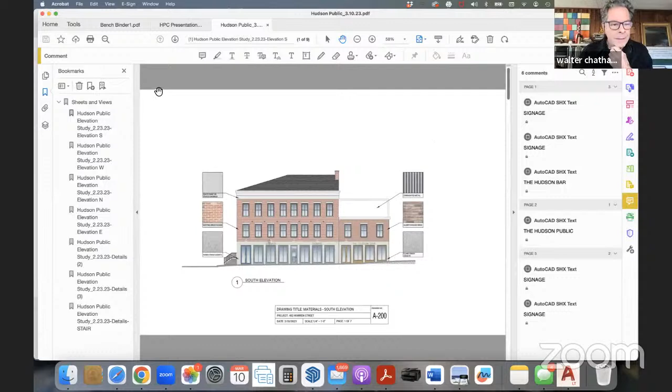Walter, is this all in response to comments by the commission at the previous meeting? Yes, my understanding was you wanted some things explicitly stated on the drawings, so we've done that, hopefully to your satisfaction. I'll run through them quickly. We've called out the materials on this page and indicated a difference between honed and flame finished granite for the two facades, and as discussed last week, slurry washed brick for this, while the existing brick would just be repointed and treated in a sympathetic historic manner.

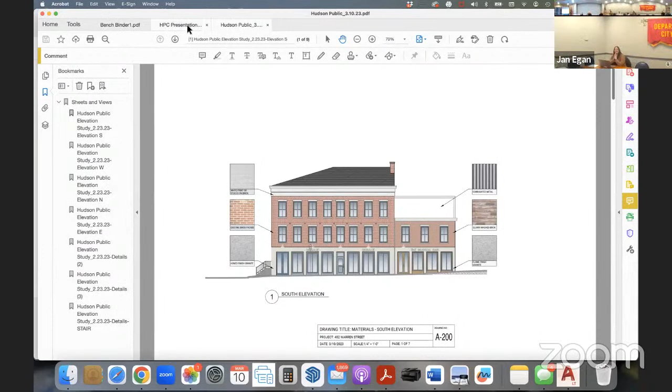Let's go back and vote on 402 Warren Street unless there's other stuff to do. Okay, I'm so sorry, so here it is, there it is right there. Can you see that? Paul has to unmute himself.

Yes, we can see that. Apologies for my confusion, I hit the wrong button and just started talking.

So I was asked, I think by Chip, to be a little bit more explicit about what we were proposing for the storefront and the windows.

So I've included the actual sections and elevations of the Lincoln windows, and these are the windows that are there now. They're actually a simulated divided light, with inside and outside bars with a little spacer between, and then the insulated glass. So these would be identical to the existing windows on the existing facade, except that the ones we are proposing will be single hung, and the other ones are inoperable.

And then there's also a single panel of glass here, which would be treated more or less like the wood panels are, but it would be glass instead of wood.

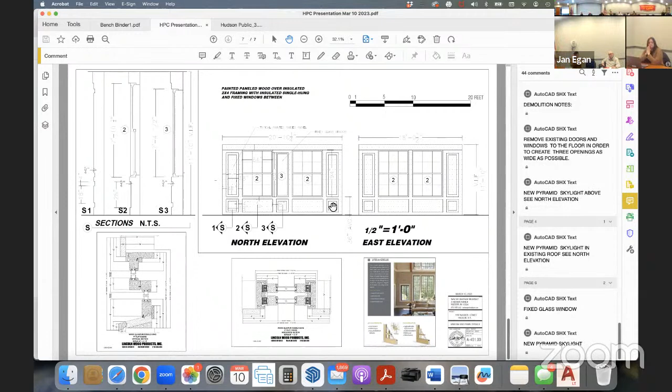Did we also ask for fence detailing and the pyramid? Okay, I have the pyramid. Sorry, the fence is just a dog-eared fence.

Hold on one second, let me see if I might have to go out to share this again. I guess he's eliminated... have you eliminated the...

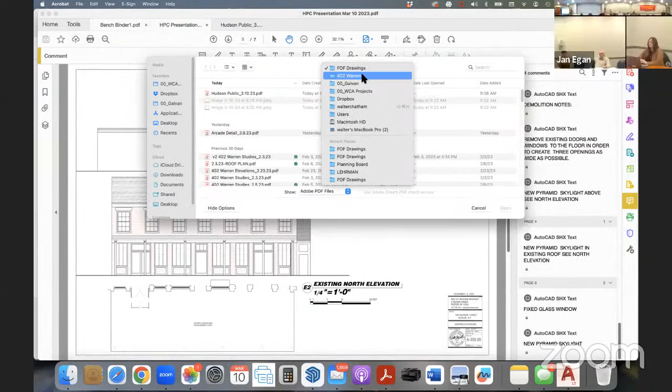Photovoltaic solar panels in this application? Yes, they were, I apologize for any confusion. They were taken out of the application last meeting, so yes, that would remain out.

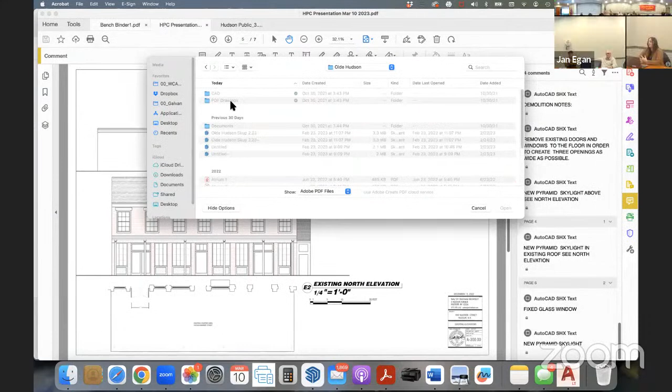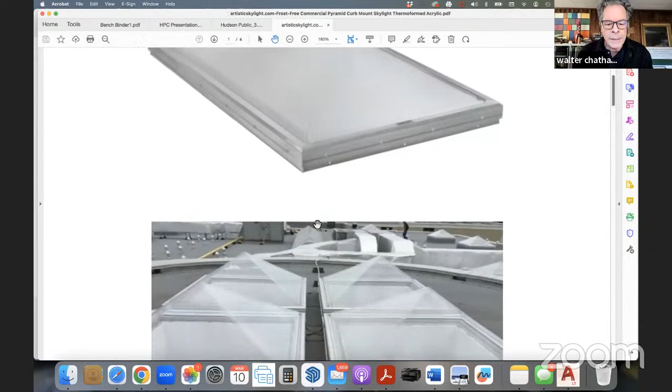Are you seeing my screen now, the skylights? Yes, okay, so again, I use this term generic. This is just one that happens to have good performance criteria, but this is really what I'm talking about for the skylight. So it would be a thermally insulated double clear acrylic pyramid, basically.

And the plan calls for one of them on top of the atrium area. Correct. But do you have the specs on the plan?

Because Craig wants to see the specs in order to give you a building permit once this is approved. Okay, yeah, sure. Generally for Craig, we just say a skylight and it meets the insulation requirements and the code requirements, which this does, but I'm happy to specify this exact skylight if that's what you're asking.

I think this is pointing out a disconnect that you have with what's required of the commission and what's required of Craig. What's required of Craig and what is required of the commission is really the same thing: a full set of construction documents that Craig can review and issue a building permit on, and that the commission can review that shows all of the details of the work to be done. So it's not one set of information that comes to the commission and one set that goes to Craig. The information needs to come to the commission, needs to be approved, and then it's given to Craig for him to approve for the building permit and to implement.

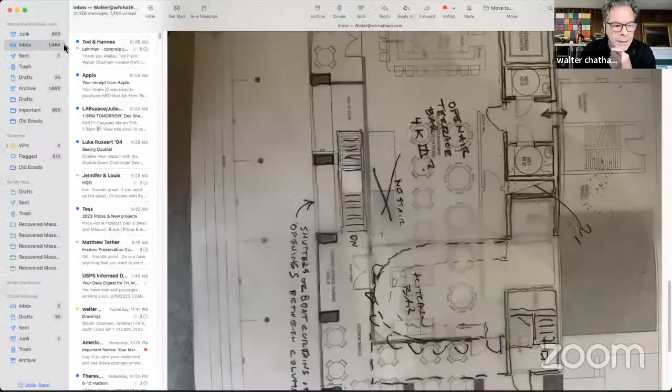Okay, this is super dangerous, but I'm going to share my mailbox. What I just sent you was this. Can you see that? It's a hand-drawn sketch. Oh, no, sorry, I'm gonna stop and start again. There, can you see that?

Yes. Great. So again, I'm super apologetic about this. I wasn't trying to be disrespectful. I thought this was so generic, if I just said it, everybody knew what it was. This is a dog-eared fence. That is 6 foot tall.

They sell them at Home Depot. The reason we're suggesting this fence is because it's going to get a lot of abuse and will probably have to be replaced frequently. So this is just a panelized system I'd like to use.

This is obviously the inside, what the owner would see. The outside is just the straight pickets. And again, I apologize. I think we've gotten 2 or 3 of these approved in my time in front of this board, so I thought this was an old friend.

Hey, Walter, that's a containment area for utilities, refuse and whatnot. Mostly for her boxes for the cardboard, yeah. I see. Okay, thank you. You did explain that in the last meeting.

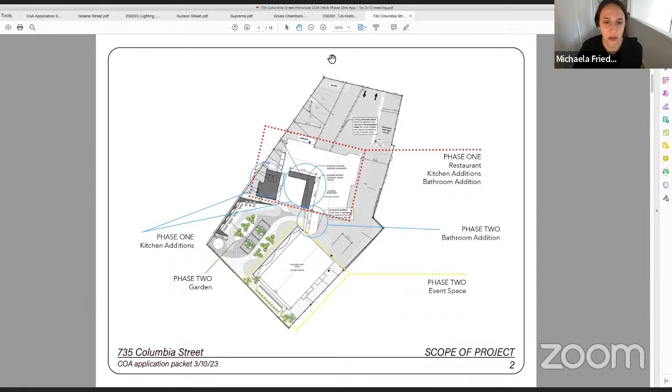So I'll hand it over to Matt to do this introduction. Sure, so this is Columbia Street right here, this would be the front of TJ's Auto right now. This is the shed in back, this is a fence, this is open to the St. Charles parking lot, and then this is an alley right here. The white spaces are the existing structure, and the gray spaces are the additions we're proposing to adapt this building to be a restaurant up front, an events space in back, and then a garden back here.

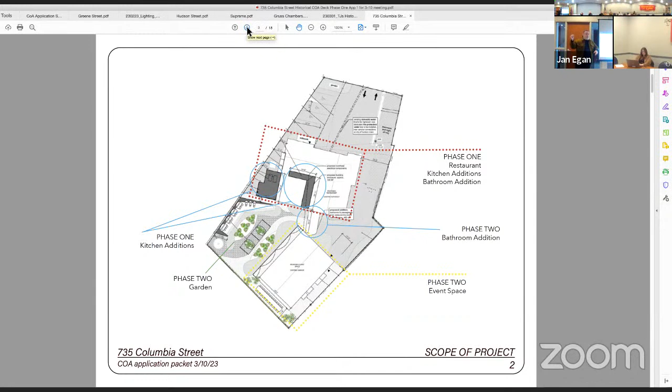So as we talked about the phases, we are going to focus on the front building first. That is going to be where the main kitchens are, and where the restaurant is going to be. So that is phase one for us, everything else is pretty much phase two. With this board we want to present to you phase one and phase two. Phase one is the front building, and then we would also tackle signage at a later date after the physical building is approved by you.

These are contemporary photographs, and you can see how we're... oh sorry, Matt, I think there's a delay, it should be on the phasing slide where we break it down by the different applications. Yeah, maybe we're there now.

Okay, so you can see how we're proposing phase one, application one: basically we'd like to make some changes to the storefront. We have doors, windows, exterior painting. We need to do some repairs to the roof. We do have some additions, and of course signage we would like to tackle after all of these things have been approved. Phase two would be about the back. Does that sound appropriate? Understood, great, next page please.

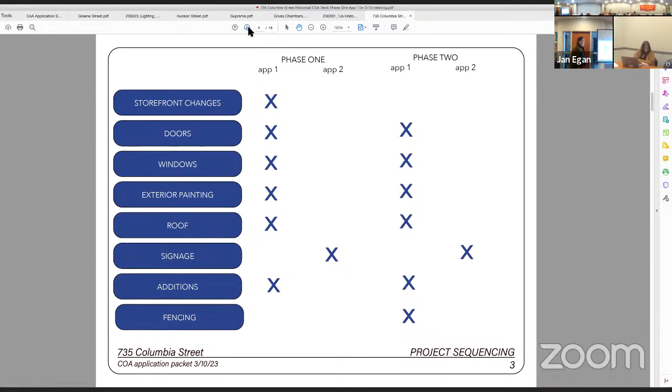Okay, so the building history: built around 1935, it's a Pure Oil station. It was white with a blue roof, made to look residential as a marketing tool by the Pure Oil company, so that this kind of establishment would be welcome in a residential community. At the advent of the automobile, people needed gas but didn't want a dumb gas station in their neighborhood, and so this was one of the first times architecture was used as marketing. It did start out white, sparkling white as they say, and the blue roof was also one of Pure Oil's brand colors. Next slide please.

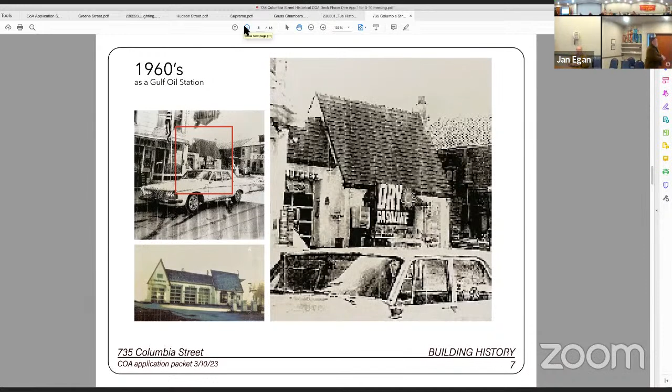So this is from the 1960s. You can see here how the building was white at one point, kind of the original coloring. You can also see that the storefront was a bit more residential looking, and it is our hope to make strategic choices to take it back to that feeling, but not necessarily restore it to the original facade. We can go to page 8 please.

So at some point—is it frozen? Did it change? No, not yet. There we go, there you go.

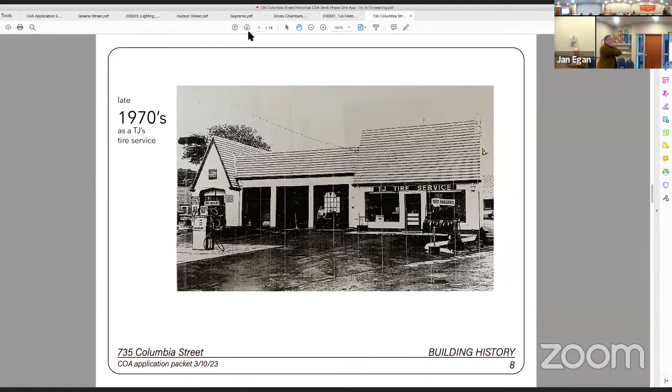In the 70s when TJ bought it, he kept it white for a little bit. You can see a bit more of the facade here, how it was amended to be more straightforward with picture windows and a squared off door. If we go to the next slide, at some point in the 80s, I'm guessing, the white went away and it turned into the version of what it is now, so to speak. It's brown now, exposed brick on the facade, and then the sides are painted to kind of match.

Sorry, I was jumping back to the original, to the contemporary photos. Did we get there? Yes.

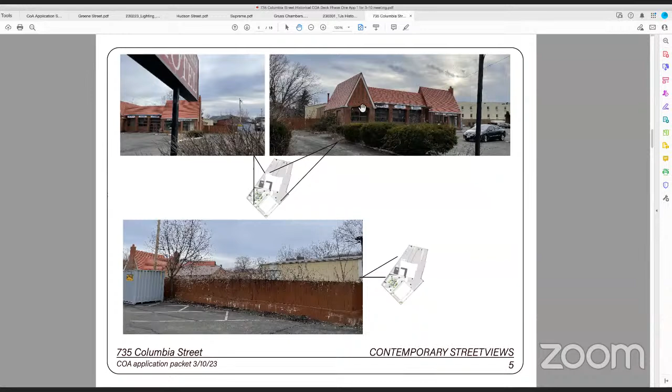Yeah, okay, just wanting to point out that TJ really loved paint and there's a lot of painted things here. The only thing that is not painted, even though it was originally, is the front facade of the brick. The roof is painted, all the trim is painted, the sides of the building are painted, the back is painted, everything's painted except for this front facade.

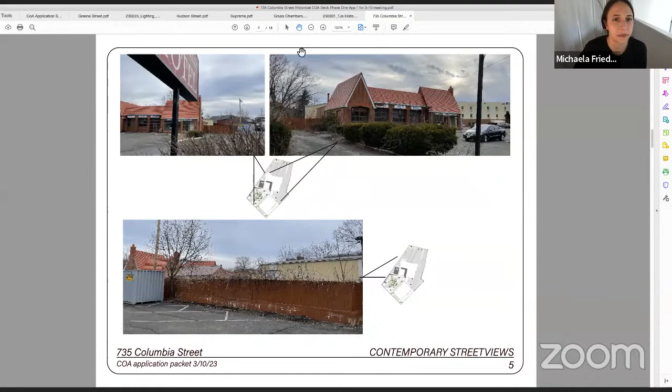So I'll jump forward to where we were. Oh, here, page 10.

Yeah, I think that's good. I'm going to jump to the elevation drawings, just because they're a bit bigger on the screen for you and a little higher definition. But I think, like Matt said, we're really excited about this combination of typologies, this commercial, more pseudo-industrial program mixing with domestic elements. We think that's incredibly interesting and would like to do the same.

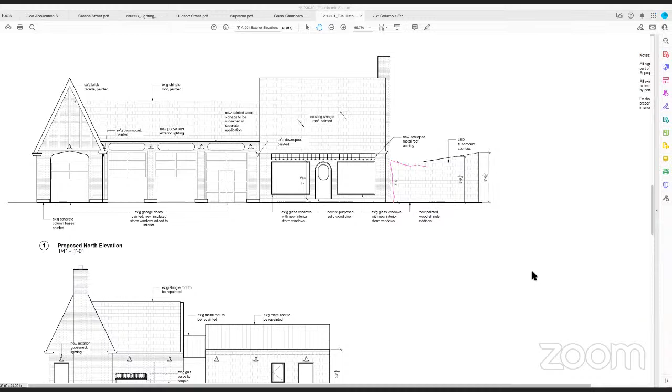And here we're using a sawtooth style roof, which is interesting - it's a very commercially used type for roof, cladding it in wood shingles, which is the more domestic building material.

So there are 3 garage doors that have been there since the beginning. They were never replaced as far as we understand it, but obviously we will need to bring those up to code in terms of insulation. Right now our current thinking is to work with an insulated polycarbonate type storm window on the interior so that the exterior image stays the same as the original doors, and paint and restore the wood as necessary - they're actually in pretty good shape. We just need to address it from a thermal perspective.

Exterior lighting, this is something that was submitted as part of site plan approval with exact specifications for the fixtures. It's a gooseneck light that is going over basically the entire building, and we're trying to really use one main light and then supplement it with step lighting at the bottom of the building for pathways as required. And the two storefront windows that are there now, we would also like to preserve.

We need to do a feasibility study. I think that they're just single pane glass. So again, we would need to look into either replacing the glass and keeping the opening as is and kind of just replacing in kind with a new specified window that meets code, or again, take the storm window approach, because they're not operable. So that may be possible to do without replacing the glass.

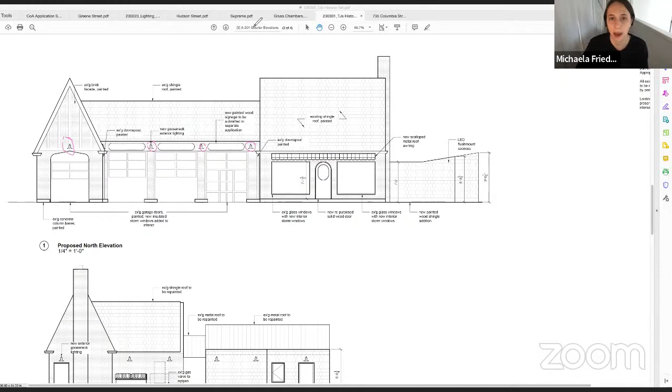And the other addition on the front is the scalloped awning, which we also drew some inspiration from some of the historic photos for. They used to have these kind of curved scalloped awnings that we'd like to bring back to this project as well. So that is the front building.

That is the front elevation from the street. If we look at the right side of the building and walk around it, that's the west side. So the front elevation is the north. And this is sort of how you get to the addition. It's sort of more of a service facade. It's where trash and recycling is. It's where the gas valve is. And it's going to be where the entrance to the addition is, but the addition is purely for back of house, dry storage, wine storage, staff entrance.

So that's what you're seeing here, this new door. And where I'll just highlight the sort of new addition is this guy right here. And that is just going to be a wood shingle. You're seeing the front pitch of the facade. It's sloping down behind it back to where the original building is. Same gooseneck lighting all around. This new addition will have a single window and a new front door.

And on the left side, actually, you know what this is? Oh yeah. Oh no, this is actually an existing window that's here, not a new window. So we would take the same approach as the front. We would either replace it in kind with the existing opening in the masonry, or put an interior storm window in because it's also not operable. So that is the side of the building on the west.

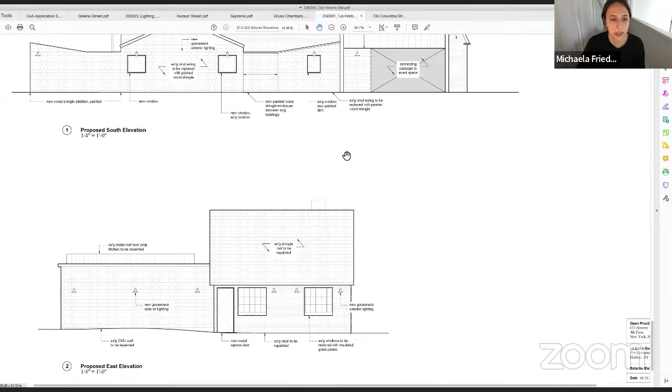So jumping back to some of the images, and anyone can also stop me at any time to ask questions and can go back to the drawings. But so this is the front.

This is one of the, so as Matt said, the doors used to be rounded. I think the windows were rounded as well. And in the 80s or somewhere around that time, they took it to this more conventional commercial square type. We really found the historical doors charming, and we need to replace the front door anyway. So we're endeavoring to, if we can find it salvaged, that would be incredible. Otherwise, it would be a new wood door in this English cottage style with a glass, a sort of oval glass pane. We would try to use this historic reference as the inspiration for that to match.

And there's also these awnings that you see in multiple Pure Oil gas stations that we're also bringing back, and would like to put that over the entire front entry area.

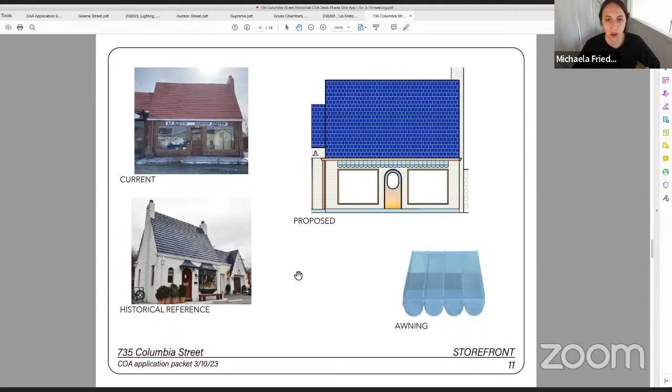These are the windows that you can see on the left. They're painted over, and we would like to work with the contractor to restore those that you see in the elevation on the right.

Doors, I guess we spoke to the front door, and the garage doors. So like I said, these are the original doors. They've since been painted over. I think that they were originally blue. We really would like to keep them. I think that they have a lot of character to the building, and it's really wonderful that they've survived all of these years. So we would really like to keep them, and just need to work with the contractor to come up with an insulation strategy that meets code.

So you had mentioned 3 garage doors were original, but I see 4. Oh, sorry, no, that's my mistake. 4. If I had said 3, that was a mistake. They're all original. One of them has this little door in it, but I don't think we would ever use it as a door. I think it would just be almost like a decorative pane. It's really a very small door. So I'm not sure, maybe they used it in the 30s. I don't know, but they would just stay closed.

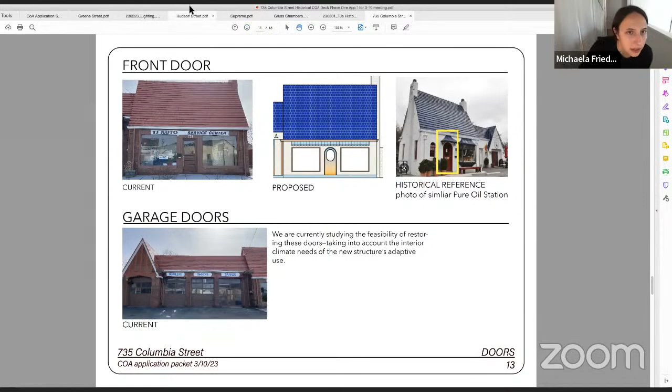So they all open through garage style. But your intention would be for those garage doors to remain as fixed elements? No, they would still be able to open. It's just that the door, let me see if I can zoom in here. All of the mechanics still work. So they still work as garage doors. There's a lever on the right side, and they go up and over the way that garage doors do, and they can sit up there.

We would just need to, if we do insulate them with an interior panel, look at the specifics of the mechanics - if there's room for an added insulated storm window on the inside, and if that still allows it to go up. It's also something that could be removed in the summer, although then we would need to replace the glass panes so that they're insulated properly to code. But no, the intention would be for the garage doors to still be able to open in the summer to let fresh air in. Obviously not in the winter.

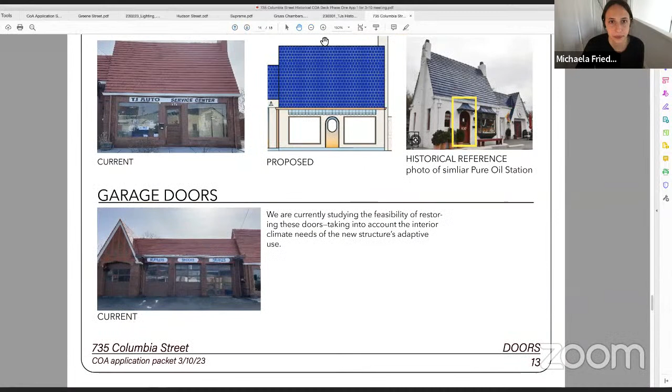Okay, so getting into colors, as Matt said, the original scheme of these stations was this sparkling white and blue roof, which we would like to bring back. We don't want to do it pure white, and we've been looking at historic color collections for some of these choices, and believe that there's some good matches here. These obviously will need to be tested on samples, for us to be able to see, and we would like to review those painted samples with the commission to confirm the exact color matches. But these are all from the Benjamin Moore Historic Collection.

The base of the building would be a very light white, not bright white, because I think that would be kind of stark in comparison to the surroundings and to the blue roof. So this is a little bit more muted. The color is called white chocolate.

And then if I can sort of step out to describe the general aura of this color scheme. When Little Debs first opened, they had friends from the community come and do interior murals, and one exterior mural on the side of the building that was this sunset ombre gradient. It became really a part of the restaurant and never got painted over or replaced. Halo, the owner of Little Debs, would really like to carry that through to this new space to speak to their original design lineage.

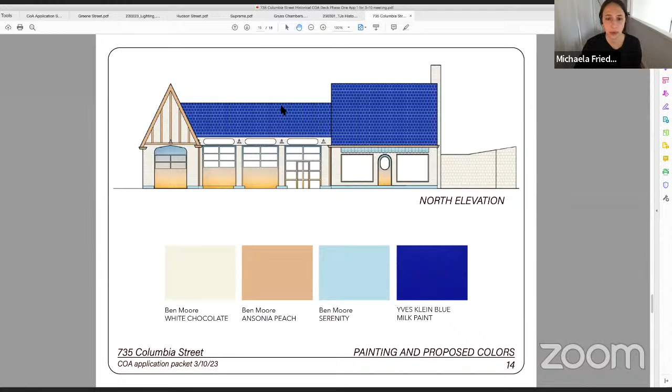There's no repairs required on this roof. It's in excellent shape on the main roof, so it will just be painted. Same thing for the brick as well. The brick is in really good shape and doesn't look like it will need any repointing. So again, it's just a paint job.

Okay, so this is the back, which is all wood shingles, and this gradient will carry over to the back. You can see the original roof that's getting painted blue in the rear. And that white neutral, white chocolate color is going to wrap all of the existing brick. So everything that's painted brick now will remain painted brick, but returning it to this white and blue scheme.

Limiting this gradient to take on areas of the facade only when it's not visible by the street, so it's not too stark a disruption. This is facing what will be the phase 2 garden, so there would be this own environment happening in the rear of the building.

If I'm understanding what you're saying, there are very few situations here where you need to introduce new materials. It sounds like there are none. There's the replacement. The only new one is obviously the new additions, and everything that's a new addition is wood shingle, and metal roof, because all the roofs in the rear are existing metal. It's only the main original roof that's shingle. Thank you.

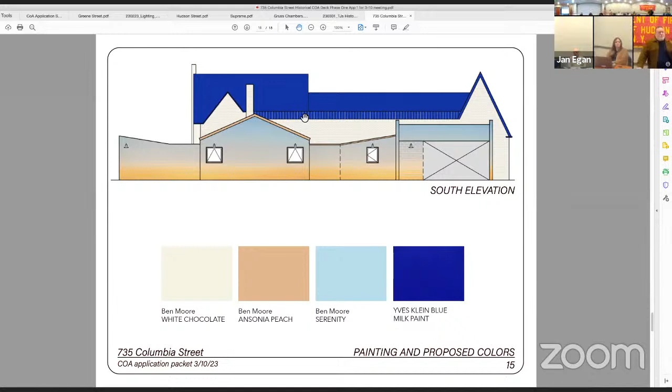So the addition on the left is wood shingle. I'll highlight here—this is new, this is the new addition, and this little filler piece is the new addition, both wood shingle. This right now is vinyl siding that's not in very good shape, this as well. So our plan is to remove the vinyl siding and make it all wood shingle in the back so that it's uniform.

What kind of wood shingle? In previous years, I've used cedar shingle, but the cost of cedar right now is quite high, so we may need to reassess that from a budget concern, but that would be the type of shingle because of its durability for the exterior.

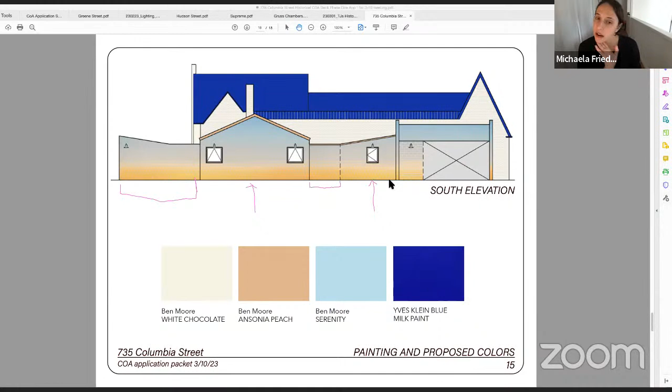It's John Schobel. Could I ask a quick question? Sure.

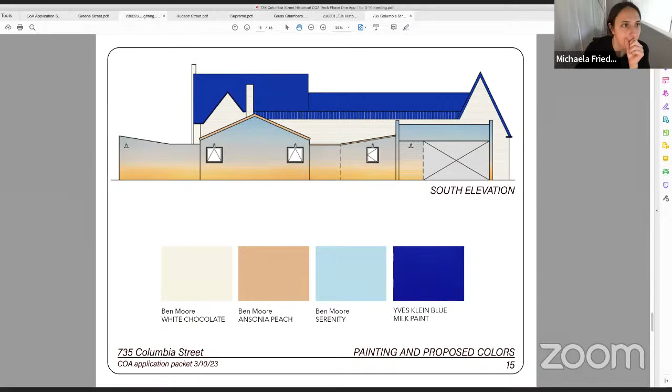The addition that you've done, is there a view of this rear that we could compare it to really quickly? Because the addition—for the existing? Yeah, existing. Let me see, I think on this front page. It's going 5 feet back from the property line, just to give a sense of how far it's coming out.

Okay, right, so on this bottom left—let me see if I can—it's gonna stick out from there. Yeah, so this door will be removed, this wall will be demolished, and it will start there, attach below the roof line at the lower angle and then pitch up, like this. My only comment on it, and I think it'll end up being minor, is it doesn't...

If you look at your proposed facade, the elevation drawing doesn't do it justice because that's set back, and you can't see the massing. It just seems like a new mass without windows and unrelated to the front facade, yet it's very clear why you did it. When I see the back facade, you're mirroring that other angled addition.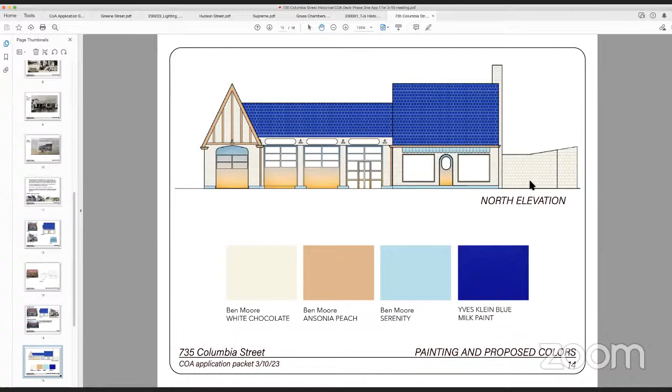And when we talk about food deliveries, there's also going to be a buried grease trap on that side of the building, so this will be the area where we get deliveries. That was just my only comment, and unless the other commissioners disagree, now that I realize how far set back it is and how it relates to the rear facade, I don't think it's problematic. Would deliveries actually come from the south side?

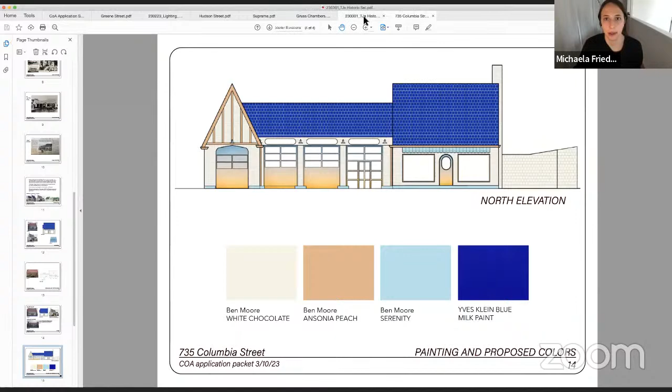We did the first one, let's do the second one. I'll jump back to the site plan. There's delivery for phase 1, delivery for the restaurant, and delivery for the event space. When we talk about large trucks for things like tables and chairs for events, those massive deliveries come through this easement on the right side of the lot. For smaller food deliveries, those can go in on dollies, which is how Little Deb's receives their food now.

The truck would just pull up in the parking area, which is all paved. Then there's this path that has a continuous 10-foot clearance to the delivery entrance in the back. The reason we're doing that is because this is the main kitchen entrance, and for deliveries you really want an unobstructed path for the delivery dolly from the entrance of the building to where they're dropping the food.

In the plan, there's a very clean, unobstructed path through to where the walk-in refrigerator is. We wanted to keep that as direct as possible, versus if the delivery entrance were, say, in the front, there'd be a lot of twists and turns to get back to the kitchen. In this drawing you're drawing on right now, we're seeing the proposed addition on the left-hand side that we're just talking about.

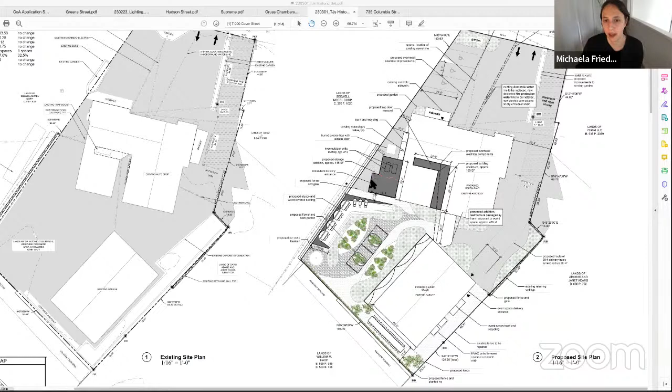There's no flat portion. The pitches are following one another, if that makes sense. So they're two pitched roofs happening at the same exact angle. Both are pitching, there's no flat roof here, so it's all going like this, I guess. It's not going to be totally flat, it will still have a 2% pitch for drainage, but it will be like this.

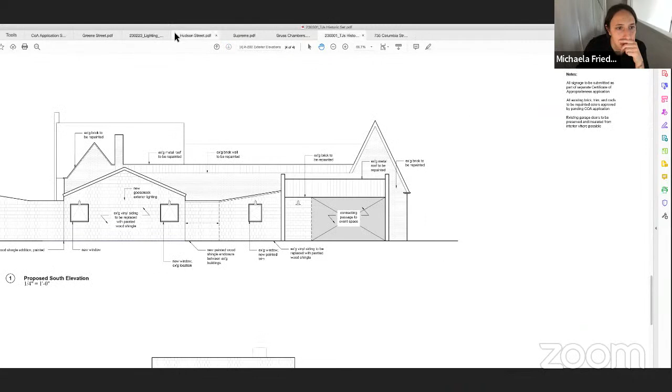Okay, but you have two distinct pitches there, one is a very low slope pitch and one is a higher pitch. Yes. Where is that low pitch and how does it relate to the existing building? The roof meets just below the eave of the existing roof. Let me see if this is shown in elevations here. Right, so we're seeing this on the left here.

Because this is quite low, we wanted to gain a little extra ceiling height where possible. Also, there's a staff room in this new addition, so giving them more headspace is nice, and it's good for drainage, which is why we used the pitch. Like John mentioned, we're mirroring the existing pitch from this existing element on the other side, so it starts up high here, slopes down, and then slopes shallowly to meet the existing underside of the existing eave.

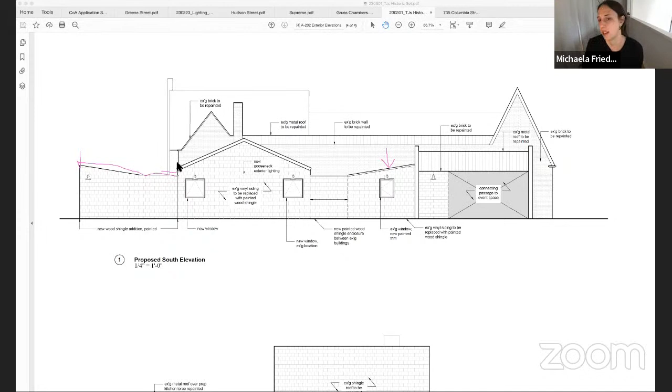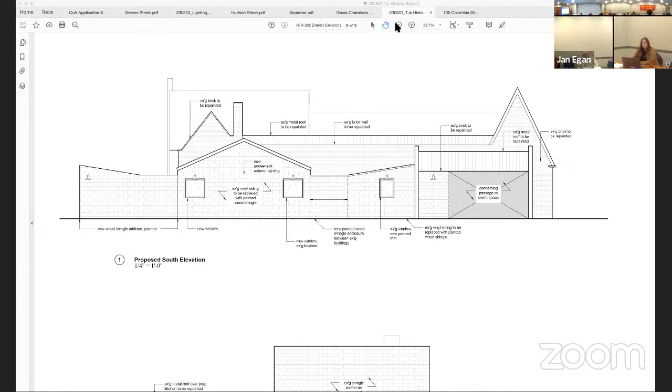Understood. However, as we're looking at this rear view, the wall of the addition is a single plane, correct? Okay, when we look at the front elevation, could you show us the front elevation of that addition?

It's a bit hard to describe in flat. I feel like a 3D view would almost be more helpful, because it's actually two volumes.

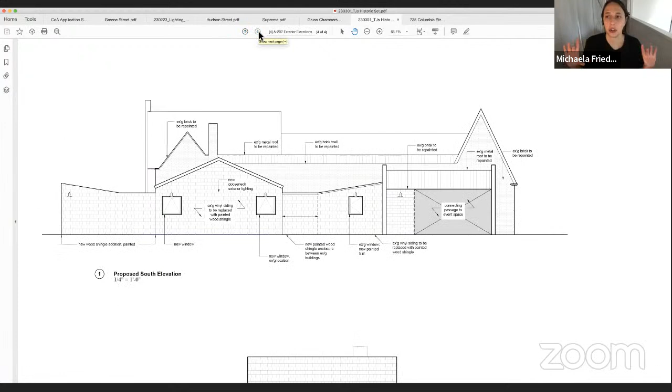The reason you're seeing it as one plane in the back is because that's the larger volume. I'll go back to the site plan quickly — we have this 5-foot setback. There's no setback requirement here, but under New York State building code, it's really about the fire rating of your exterior wall. If you're over 5 feet from the property line, you don't need as high a fire rating, which also makes it a cheaper exterior wall to build, with fewer details to get approved. So for our purposes, we offset the existing property line by 5 feet and are building within that confines, if that makes sense.

So it's sort of stepping. Yeah, I think it's very useful to see this in plan view.

I just wonder whether the higher slope roof is going to present a different proportion to the street, because in the rear elevation you're showing us, it starts up higher and goes back down. It'll be much less so in the front elevation. It would be very useful—

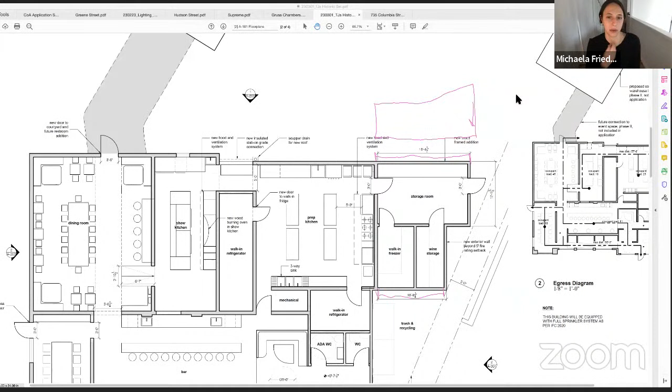It would be the front wall. In other words, you wouldn't see it from the rear though. So this is what you just sketched, the front. Use the sketch you just made up top as your front elevation. As the rear? No — you're saying the front, exactly.

So if that sketch you just erased was the front elevation, then where is the corner? You have two corners that are 5 feet away, right? Correct — this line and this line. So up top you'll have a line like this, there, correct? And so that higher pitched roof is actually going to be set back, offset by the plan. Exactly, it's set back. It's important for the commission to understand that.

I think that because of the low slope roof, it may only be 7 feet above grade, as you can see in the earlier photograph showing the side door going into the existing building. What I want to point out to the commission is that this addition is very much at the scale of a fence, and has much more the appearance of a fence in terms of massing than a building with a roof on it, because you don't really see the roof. So as an architectural element, it's very much downplayed because it has the scale and appearance of a fence.

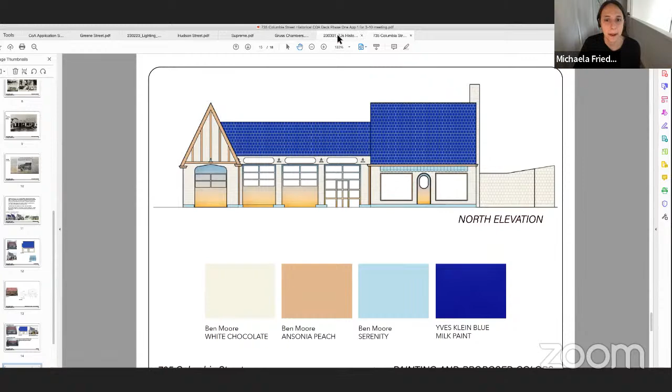Yes, so it's in the plans, or the elevations rather. I think that some consideration might be given to visually protecting that from the street.

Even though this is, when we think about this building, it has a very unique visibility from Columbia because of the parking lot of the St. Charles. And so I think that this addition you're proposing on this side will have some significant visibility, and I think it just needs to be understood by the commission. It's a little hard to understand it because, as you point out, a three-dimensional sketch of this would be much more informative than the plat that you have.

Sure. And I think that, is there a fence now in between the St. Charles parking lot and this property? There is, yeah, it's on the property line, not on the 5-foot setback. Yeah, understood, but it's on the property line. What is, who owns that fence? Is that your fence or theirs?

It's their fence. Okay, and so I just think that looking at this in a holistic way, particularly viewed as it can be viewed predominantly from Columbia, would be very useful for the commission to see more of a three-dimensional aspect of this because of the angle of the property line and the existing building.

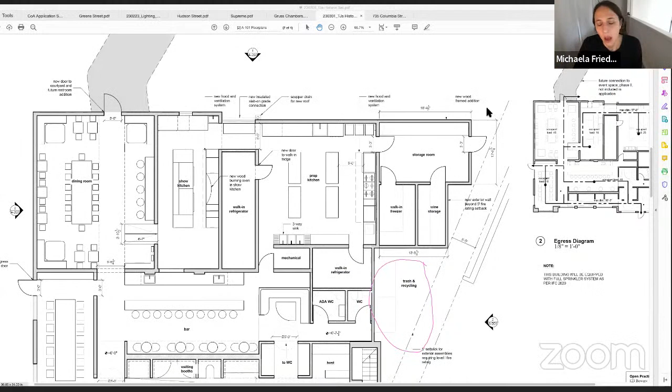Thank you. So I think that this addition is kind of the only really difficult part of this presentation to fully understand, and you might want to rethink it to make it even more background and less like the original building.

Sure. So if I could speak to that really quickly, we can definitely do a little 3D study and submit that view to you.

And look a little bit more at screening for the trash. Maybe we need to make our own fence. I don't know. I think I can take some views, some more detailed shots of the fence that's there now. It's not in great condition, to be honest, but it's not our fence, so I'm not quite sure how to navigate that.

The one thing I would say about this front elevation, and it's interesting that you picked up on this, is that we went back and forth about the color of the addition. There was one version where this was painted entirely in the Ansonia peach, so that it was kind of identified as a new element, but it actually ends up drawing more attention to it in a way, and kind of detracting from the historic facade, which is why we reintroduced this gradient color scheme on the doors of the existing facade, and why there's a blue roof on the existing roof, to try to draw attention to that and away from the addition.

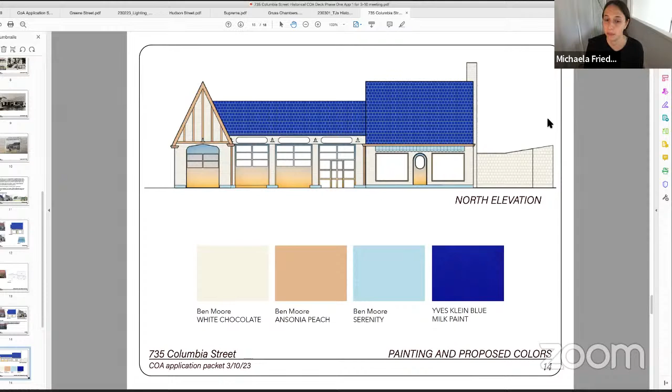And I do strongly believe that it looks better in the cream rather than the peach, just because of the vibrancy of that color, and detracting from the main facade, if that makes sense.

I think your assignment of the peach color to the entrance and doors of the building makes perfect sense. I don't think peach is the right color for the addition, but I think the addition just needs further study, and it needs to be presented in a way that the commission can really understand the three-dimensional aspects of it.

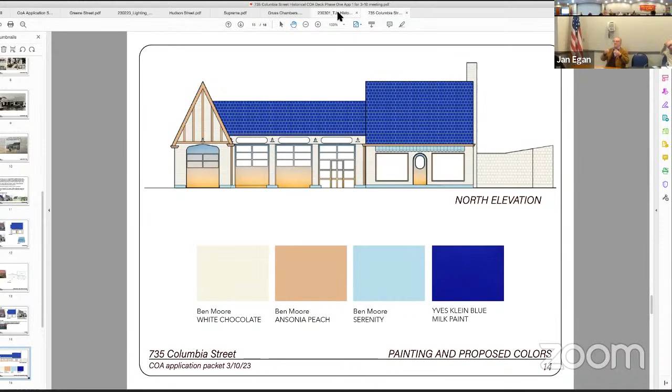One thing you might look at doing would be a residential scaled fence and gate closer to the front elevation that would enclose all of that area, and visually protect it from the street, from the parking area.

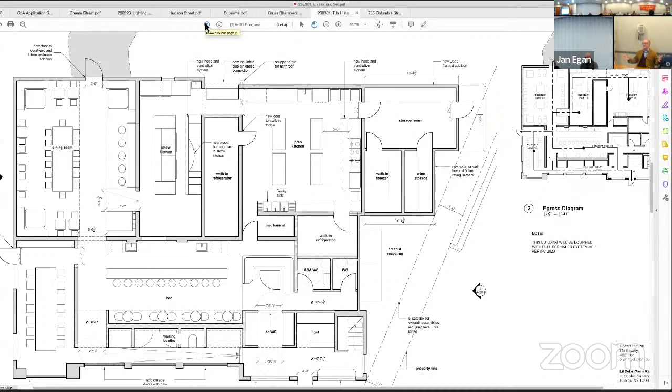And actually, you're mentioning landscaping. I think that's a really critical part of making this a building which has suffered with just having a fully paved front yard, to generate some of that residential aspect of the pure oil concept. Think about the landscaping in the front parking area that would begin to introduce it more into an element of a residential landscaping design rather than a paved design, side property to side property.

Right, I definitely agree with that. We are doing this new garden where the sign is now. There's a planting bed there now, but it's very sad, it's a sad planting bed. So we're going to redo that landscape as this garden in the front that's right on the sidewalk of Columbia where the sign will be. And actually, I guess this should have a green hatch on it as well, now that I'm looking at it, because this has also plantings dividing the easement from the parking lot.

For accessibility reasons, we want to keep 3 ADA spaces there, and also have the ability for the truck to drive up so they can deliver food. So even though we'd love to landscape the whole front, it's not practical in terms of the accessible parking spaces and deliveries. So what we're doing is clustering this garden around the existing sign, also so that it's not blocking traffic patterns for incoming and outgoing traffic, and also planting this little garden next to the entrance.

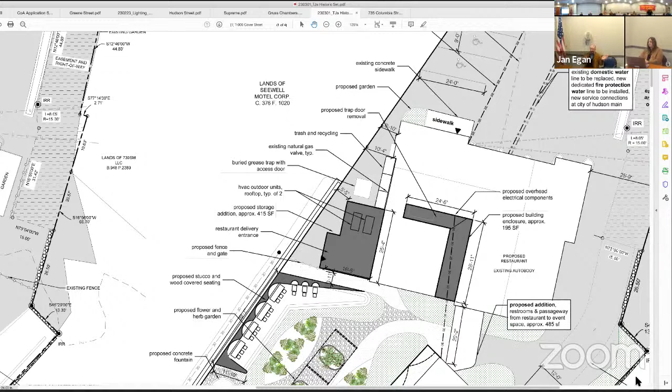One thing you might think about is where that line is that says 10 foot, that might want to be a fenced and gate area. That might be positioned to the side elevation of the main building, because that side elevation is really dramatic with its steep roof, and that's an important signature of the building, to see that three-dimensional aspect and side elevation. If that fence and gated area would visually protect the dumpster or all your recycling stuff, but lend a kind of residential rear gate, side yard gate, to enclose the rest of that stuff, I think that would help feature the building and visually protect all of the other stuff.

Sure, we can look into a fence study for that. My only concern, or not concern but wonder, is that because of the really dramatic steep pitch, I would want the fence to fall on the downslope of that roof so that you get to see the entire pitch.

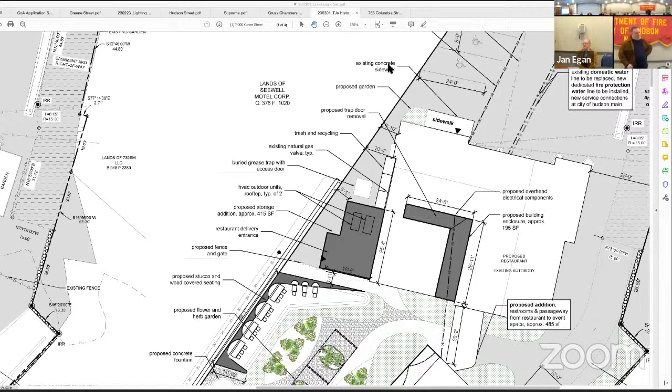I agree 100%. Can you look at the side elevation? Can you show us the side elevation? Can we stay on this for just a second?

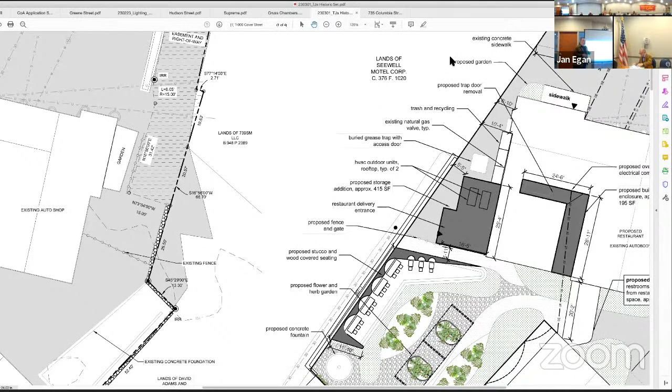I also just want to point out that the way this plot and building is angled, there is a 7-foot hedge that basically starts here and goes towards the park. So you've got to be in the St. Charles parking lot in order to see what we're looking at. Otherwise, the angle of the building blocks this vantage point from Columbia. So if you could go to the page that shows street views, page 5. Yeah, exactly. Matt, who owns the hedge?

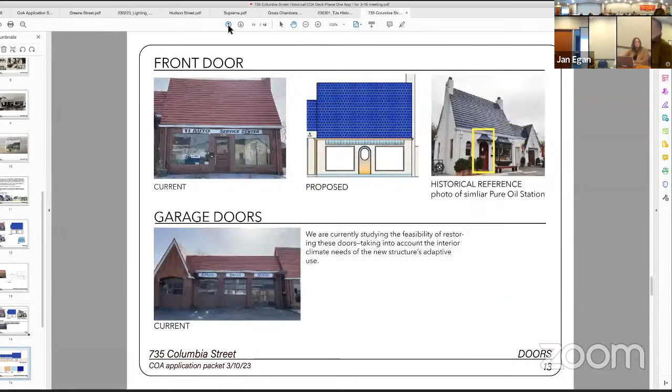That might be on St. Charles' property - if you're looking at our building, it's to the right. This is the view we're talking about. I used my phone and took that photograph over the hedge, just to make sure we understood the vantage point.

In these photographs, what we see is the sharp gable end on the left-hand side of this building, and on the upper right-hand corner, that sharp gable end on the right-hand view. If you point to the left garage bay, that sharp gable end is identical to the one on the right-hand side we're talking about.

But rotated and perpendicular. So if this fence visual protection area were at the rear of that gable end, then architecturally we're going to see that whole thing, and part of that landscaping at that corner and joint. I think that would be a much stronger visual solution than leaving all of the recycling stuff exposed.

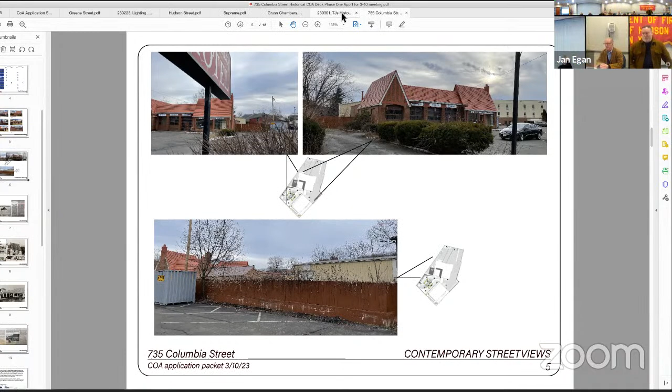This new addition element shouldn't be confused with the original design, but that makes total sense. It's a great concept, a great plan, and this is just a minor point compared to the entirety. But thank you very much - it's a great concept and good on you. I agree, this is going to be a fantastic addition to Hudson.

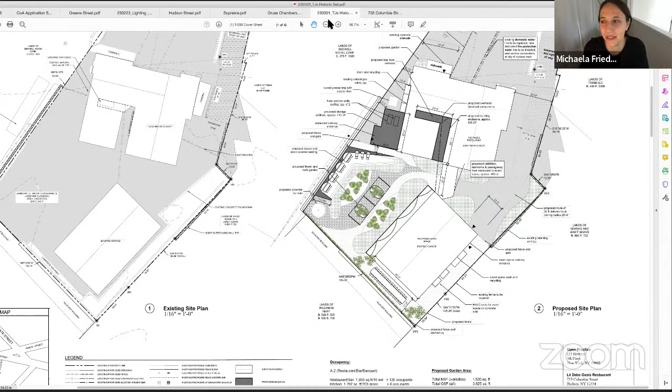We're very excited about it, yes. It's going to be a wonderful thing for the city, and a wonderful marriage with the Lil Debo brand. I think it's really sweet. It was very easy to do - it's a concept essentially from, blue being one of Halo's favorite colors, like the Yves Klein blue, and couldn't ask for a better place to start, like a pure oil service station with a blue roof to start with.

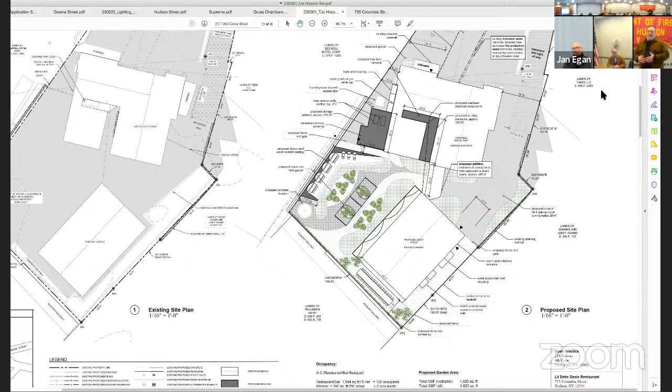Where are you guys now in approvals and such? In the planning - we're really in the front half of the process. We presented at the 214 planning board meeting, so we have follow-ups for the meeting next week regarding parking and sound. Then it's my understanding we would hopefully go into the public hearing sector, unless they have other questions with planning, so that process is underway.

It is underway, and you have a schedule going forward. Yes, we've presented twice to planning, and this is our public review on Tuesday, the 14th. What are you looking for from us?

We're looking for approval for all of the changes we'd like to make to the facade, approval for color. We are quite likely to approve color, we rarely interfere with that. Great, and so we have the addition, and all of the doors and windows that would be amended in some way, maybe.

Was that included in what's submitted - the door specifications, the size you're going to build or create and/or salvage, the size of the window, what material? So that's follow-up for us then. Yes, if you need specifications, drawings are going to be needed. We had this conversation before - we need to know exactly what's going on, as specifically as you can make it with the exterior. We don't need to deal with the interior particularly, unless there's an interaction we need to understand, and you need us to understand.

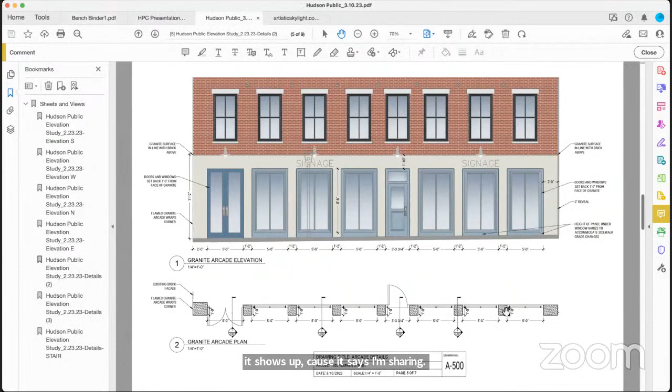Oh good, I've just unmuted. May I share my screen? Can you hear me? Yeah, yes. Okay, just give me one second, sorry. There, do you see that? Is it there? No. No, but there might be a delay, try it again. How about now? No, there seems to be a lag. All right, Michael, just wait a second, maybe to see if it shows up, because it says I'm sharing and I stopped. It was there for a minute. Well, a minute. It says I'm sharing, exactly. That's 50 times. Okay, just give it a second. Here it is, great.

Okay, thank you all. Let me just go back very quickly to the beginning of these drawings. So very quickly, at the last meeting I think things went well and everybody agreed to things, but we were asked to specify various details and also make some things explicit on these drawings.

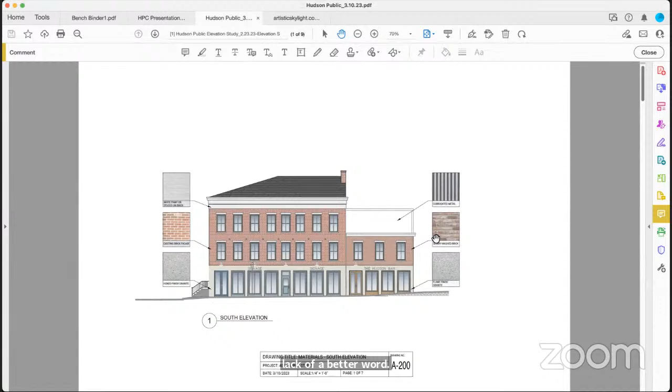So the first drawing simply explains the materials that we discussed last time: white paint or stucco on brick for the cornice, the existing brick will be repaired and repointed. We would do a honed finish granite on the historic arcade portion and a flame finish, which is a more, for lack of a better word, rough, flaky, textured finish on the addition. Also on both additions we do slurry washed brick on the street, and then we have the corrugated metal.

And I know everybody probably has seen this, so I'll go through quickly. Same thing on this side, just the materials, calling out the various stones that we're proposing using.

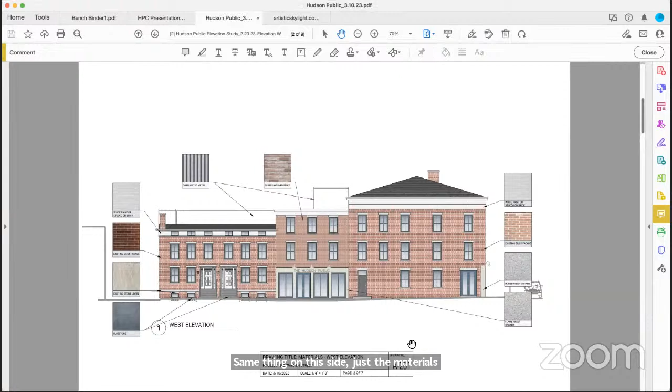Okay, and this is an important drawing, but it establishes the idea that we're going to go for a granite arcade that will show at least 12 inches of depth down the facades of all of the arcades. So this would be taken as a typical detail for any of the three arcades: the existing building, shown here, the new addition, and also the hotel addition.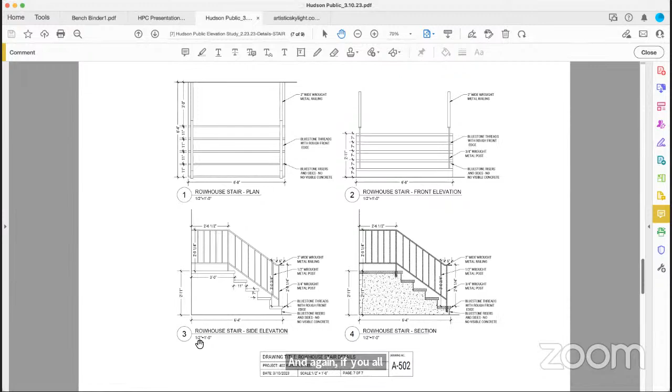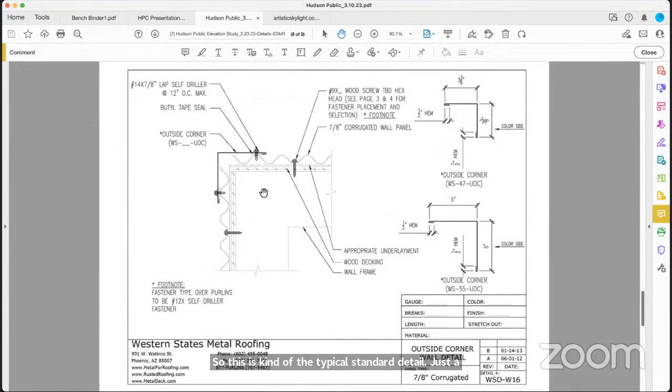And then we were asked to do corrugated details, and the only thing I could think of is the corrugated metal, you just have to do a corner detail. So this is kind of the typical standard detail, just a metal fastened outside or inside metal corner to cover all situations. And I believe that's it.

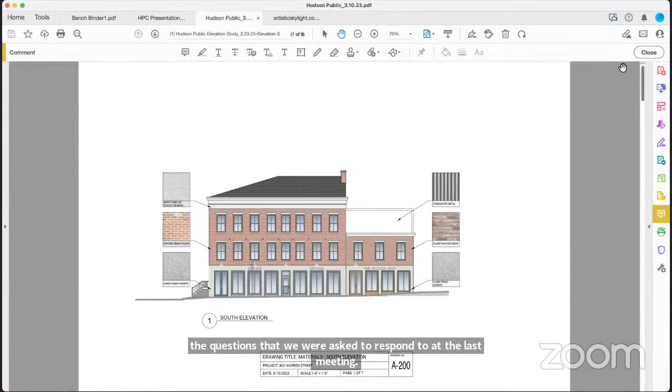So that, I hope, covers all of the questions that we were asked to respond to at the last meeting. It does, yeah. Well, but I think what we talked about at the last meeting is that we need all of the details for everything, not just the list.

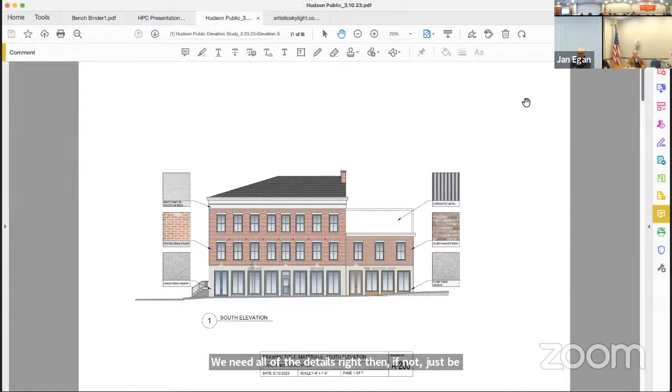I'm sorry if I've again misunderstood. I thought we were asked to come back with the materials and details sufficient for you to evaluate the design intent. I'm happy to give you what else you need.

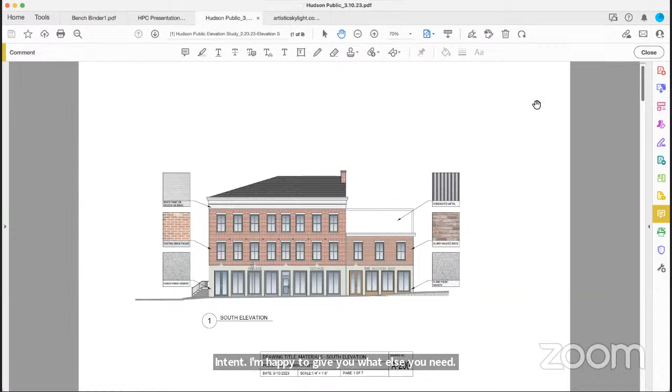Or we're talking about speccing out what you just described and getting that to us, and then we can review it at the next meeting. We did give him, we said this is a great concept.

I got that, but what we also asked for last time is the detailing of all of the exterior elements, not just, we listed some that we were very interested in, but we didn't list. We don't have detailing, we don't have the site surfaces coming off of the park, off of the alley. We don't know what that material is.

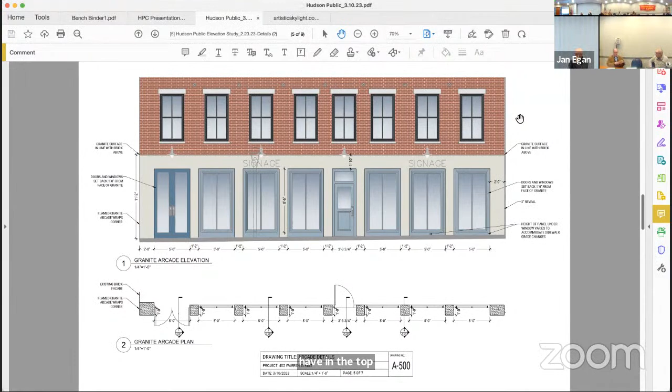No, I agree. He was demonstrating, I think, in all fairness to Walter, and I don't want to shame myself.

He was trying to be responsive and show that he had responded affirmatively to what we were asking him to look at. I agree, we need another meeting. Okay, thank you for that. That was the clarification exactly that I was looking for.

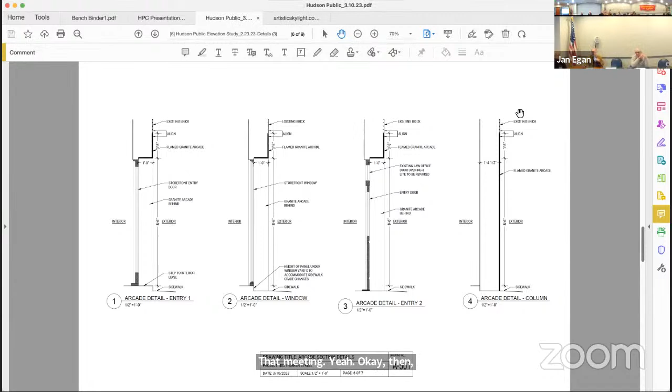Walter, you're mentioning the use of granite for the arcade, but isn't it marble? I am not a stone person, and I thought it was marble originally. Then I went back and looked and I thought it was granite. So I'll just say that if it's not granite, it should match whatever is there. Let's establish what it is.

It's painted, so it's extremely hard to tell. It has a beautiful kind of old attorney's sign that was hand painted with white and black paint 100 years ago. So I guess we'll just have to take a little chip off somewhere it won't show, to look at the inside of it. My guess is that it would-

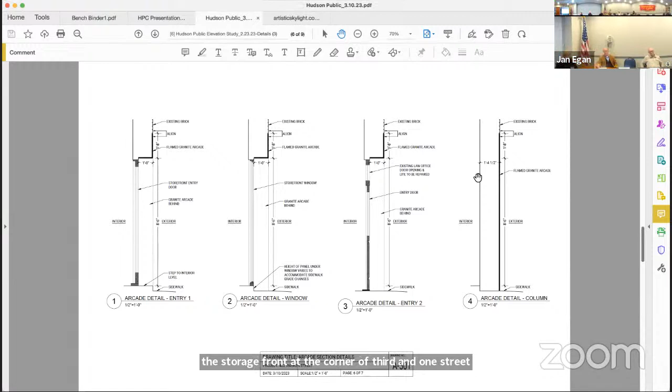Because I believe that the stone used in the storefront at the corner of Third and Warren Street, which has been discussed as a traditional or historical model for this storefront, I think was marble, white marble, not granite. So we'll know for the next meeting.

Walter, you've submitted a number of times, and each time we're getting new packets. It might be helpful to have one complete set of what the final was on all facets of the building. You made lots of changes and presentations, so let's have one final set so it can be approved and everyone is clear on what the final set is.

Totally agree with that, and I apologize if I misunderstood the process. When we have a meeting like this and someone says it's granite, or it's marble not granite, we would change it based on trying to figure out whether it is granite or marble. Hopefully at the end of the process we have everything, but I understand what you're saying.

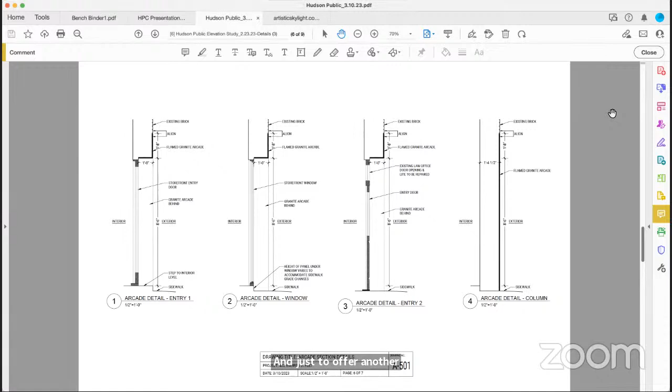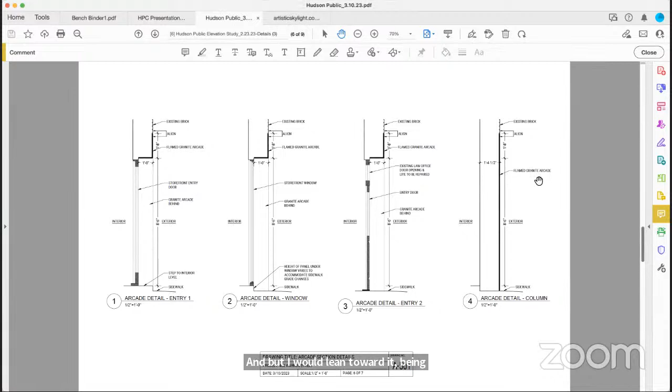Well, they're gonna do a check and get back to us. To offer another example of a similar front, although different, 701 Union Street has marble piers and it's all marble, and nothing's happened to the surface, so it's fully exposed. I would lean toward it being marble, but if you can check it, that would be good. Thank you very much.